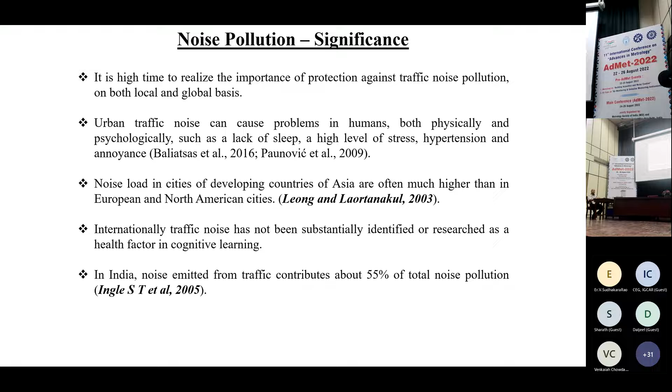So everybody knows what is a silent zone. Within 100 meters of any institution buildings like hospitals, educational institutions, courts are silent zones. But these silent zones are very crucial and have significant health impacts on school children and hospital patients. When I talk of hospital patients, if they are neonatals, that is very, very crucial. And even in judiciary proceedings, these are all silent zones as per the CPCB rules, noise regulation and control rules 2000.

What three activities are banned? Use of vehicular horns, loudspeakers, and bursting of crackers. They are banned as per the amendment 2009.

So it is necessary to assess and mitigate noise levels in these areas of silent zones.

In the silent zone, CPCB says that the permissible norms for daytime is 50 dB, whereas the actual values may vary from 55 to 79, and maybe in some congested cities it may go up to 85, 86 decibels. But these are the observations of tier 2 cities, 55 to 79 decibels. So you can imagine what is the level of non-adherence to the permissible norms of 50 decibels.

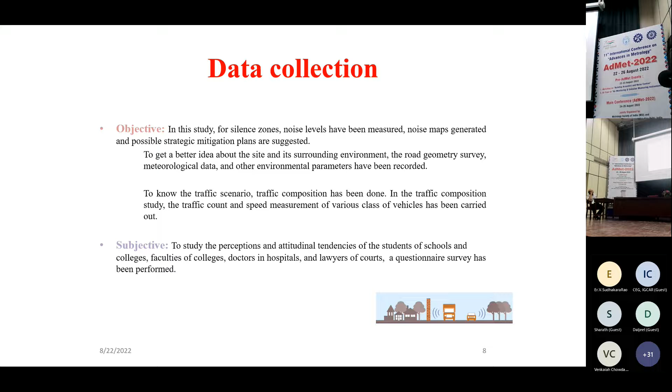So these were the monitoring points of the silent zones in the city, which were carried out over the last 1.5 years, as a project of a PhD student. So 4 hospitals were selected, 1 school was selected, 4 colleges were selected, and the last one, the 10th, is the court, which is the district and sessions court of Surat city, Surat district.

These are the 2 arterial roads. I think you cannot see the fonts, but I can read out: the institutions are 4 hospitals, 1 school, 4 colleges, and 1 court.

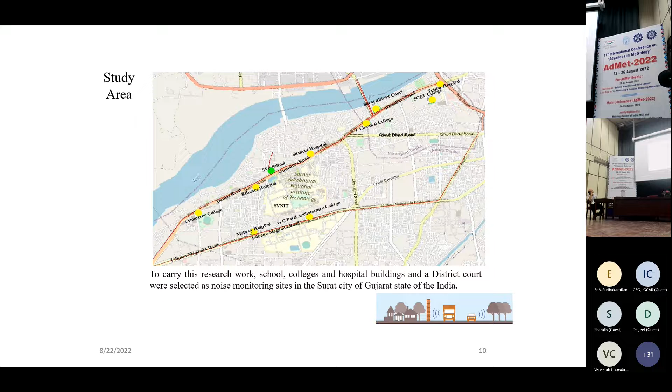These were the instruments used, as I told - a class 2 precision sound level meter. Rather, not 1 but 2 sound level meters were used: one to measure the noise levels just immediate to the source, that is on the roadside curb, and second at the receptor level, which is the exposed group of people, maybe a school or a college or a hospital or a court. A radar gun was also used to measure speed. A GIS was used to generate noise maps.

SoundPLAN - the work is being undertaken by the PhD student. He is preparing the noise barrier design. Still, it is under progress. I won't be able to show it.

These are some signage boards as per CPCB rules, for the institutions just on the roadsides.

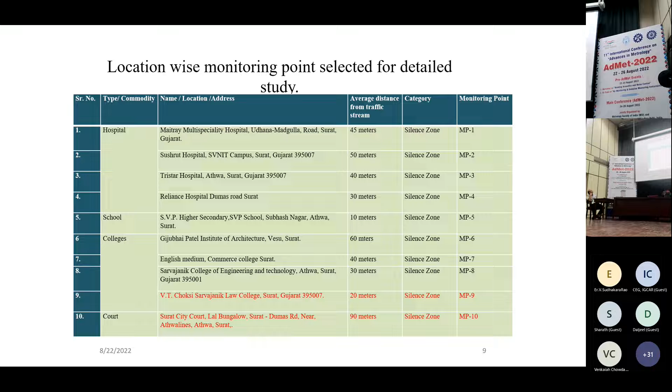So, traffic composition and noise levels. You can see inside noise, that is inside the institution. As I have shown, these distances mean the inside distance is from the actual source of the noise, which is road traffic. So the outside noise is the road traffic noise just at the curb of the road.

These are the graphical representations using two vertical axes. On the left vertical axis is the traffic volume count in the form of two-wheeler count, three-wheeler count, and four-wheeler count. Four-wheeler means basically cars, as heavy vehicles are not permitted during the daytime in Surat city.

What I can say from the traffic count is that, like all other cities of India, 70 to 80% of the share in the traffic composition is coming from two-wheelers, and the honking of horns by two-wheelers is the major share in this road traffic noise.

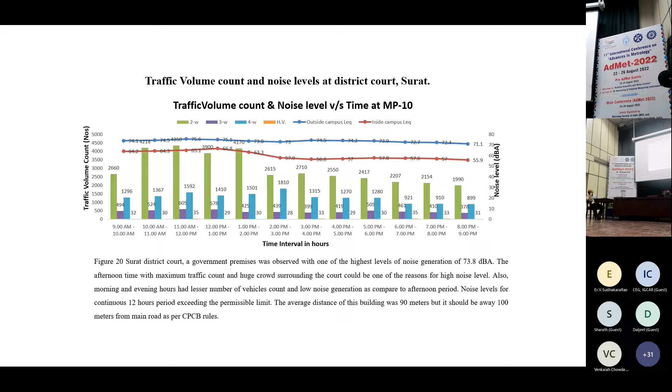I have not narrated the steps of the noise maps, as the audience is well aware of that. So this is a 3D map of the area generated in SoundPLAN, which is a current work being undertaken by the PhD student on noise barrier design. The law college, which is just adjacent to the roadside, is having significant noise levels inside also as compared to the outside.

This is the final noise map. As you can see, this dark red map is the VT Choksi Law College, and this one is the road, and the second line is the flyover bridge just adjacent to the road.

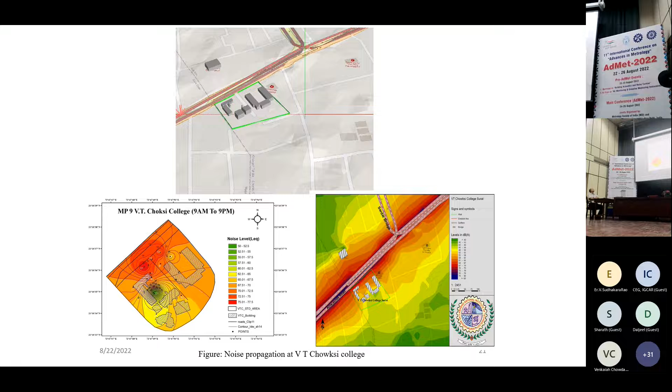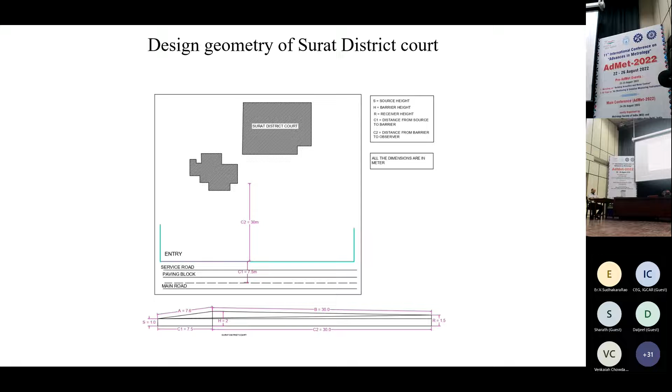Second case study is of a court. As I told, it is far away from the roadside curb, approximately 90 meters. Judiciary proceedings are going on in this institution building. In the noise map, this is a 3D map, and they are far away. This is a road, and from the road, the noise propagates and is almost coming to around 55 to 57 decibels.

So my second point of submission here is that if there is enough noise propagation distance available, maybe we can avoid the noise barrier, which is very costly. As said by Professor Parida of IIT Roorkee, approximately 1.2 to 1.5 crores of rupees is required for design and construction of a 1 kilometer stretch of noise barrier.

So this is a unique location. Here, natural vegetation can bring the noise levels from 55, 56 decibels to the permissible norms of 50 decibels.

Third aspect is the strategic noise mitigation, which I'll try to finish off very fast. I think I'm running out of time. Should I take 2 minutes more, sir? Yeah, okay, please. Fine, I'll wind it off in the next 5 slides.

In last year's international workshop by the NPL, I had given an emphasis and explanation of all these things. I think it was in October or December, 2021. This presentation of each and every component of noise mitigation was narrated by me at that point of time in that workshop, so I'll not go into the depth of each and everything.

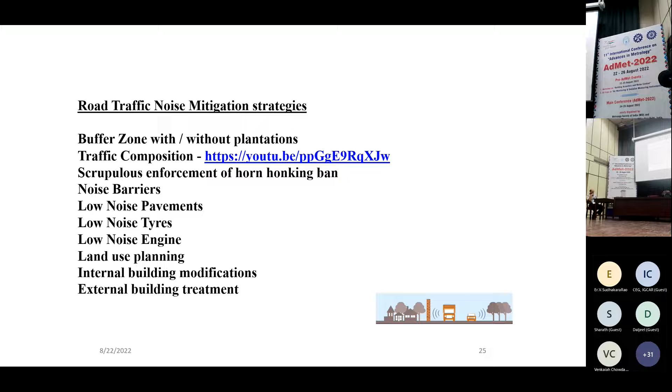One more aspect is 2-panel doors and 2-panel windows in schools, colleges, and hospitals, which can reduce noise by 4 to 7 decibels. A reduction of 4 to 7 decibels is a very significant achievement as per acoustic theory. I think I'll end here.

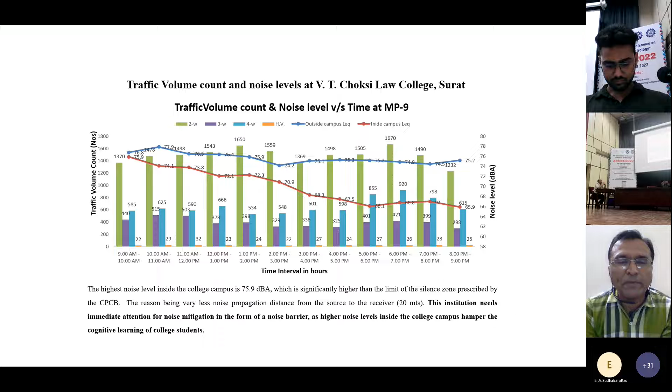Yeah, but highways on the outskirts of cities can be considered for that. Yes, it is being done. If you take any expressway or new highway by NHAI, it will definitely have plantations. The National Highway Authority should make it mandatory to go ahead with this kind of plantation.

Yeah, if you have any information, please share. Otherwise, no problem, I'll share it with the NPL people. Okay, thank you very much, Professor Pendel, for your nice presentation.

I think, sir, can I have one suggestion? Yes, please. It's a very good thing to gather people working on this, because in environmental engineering, of course you're all acoustic people, but we've had water and wastewater for 30-40 years, air pollution for 10-12 years, but noise is a neonatal field, it's being born in India. Am I correct, sir? Yes.

Since only the last 4-5 years has there been awareness about noise. So as I was listening to Lokhande sir's presentation on tunnel noise, it's very fascinating how people are working on this. My humble submission would be that if we keep fewer presentations and increase the duration to 30-35 minutes, that will allow much better interaction, sir, rather than having 15 minutes like we do in our conferences. This is just my suggestion, sir.

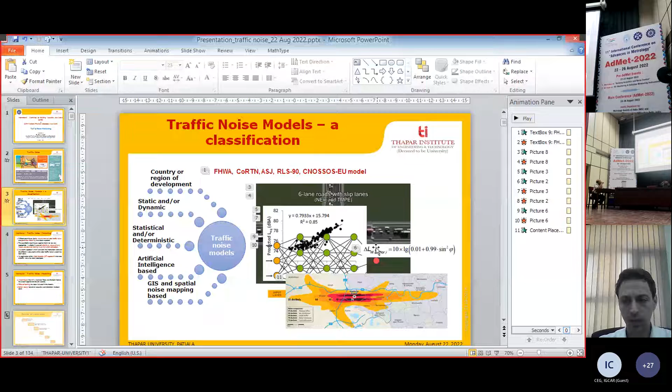Your slide is not moving actually. Slide is not moving. Yeah, make it full screen. Yes. Is it moving now? No, still it is the same. Not moving. Hello. We are not able to receive you also.

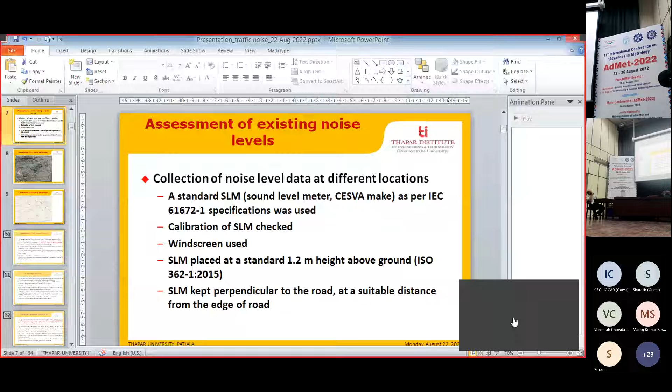Is it visible now? Yeah. And the slides, are they moving? Yes, yes. Sorry about that, now they are moving. Yes.

I talked about the classification of the different models, the type of models that are there.

Okay, I hope now the slide is moving. Yes, yes, they are moving now.

So I'll be talking about the graph theoretic approach, which can be used when there are subjective, vague, or fuzzy inputs, and decision making involving human perception is involved. Also, artificial intelligence or machine learning techniques like ANN, decision trees, and random forests.

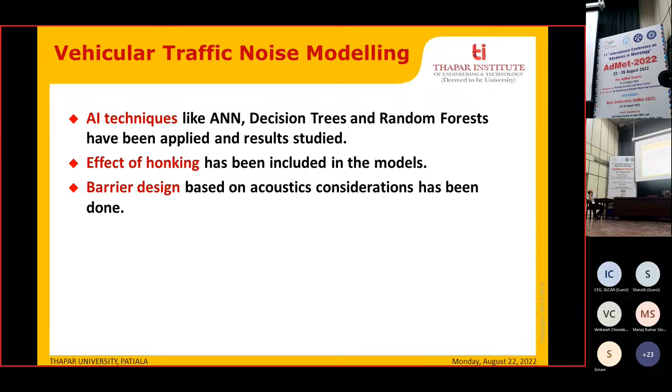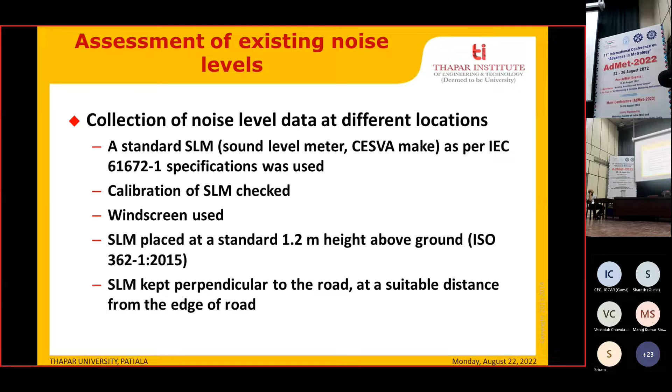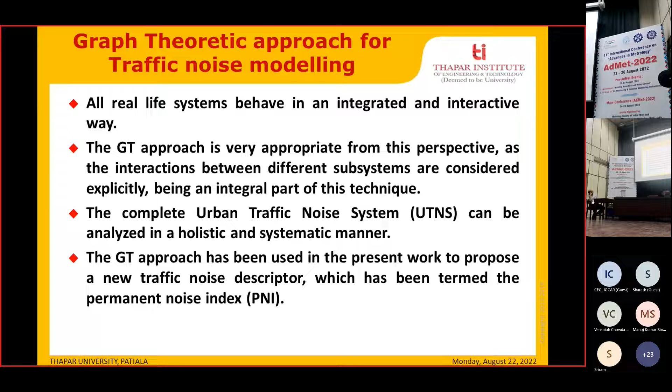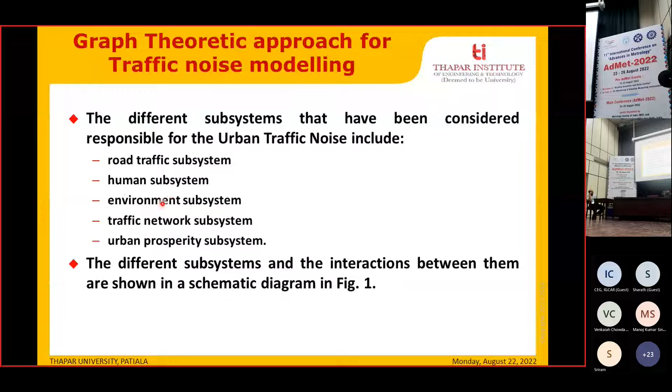First, an urban traffic noise system was formulated, which can be analyzed in a systematic and holistic way. We'll see later that a permanent noise index was also developed on the basis of the considered criteria. Within the urban traffic noise system, 5 subsystems were considered: road traffic, human subsystem, environment, traffic network, and urban prosperity subsystems.

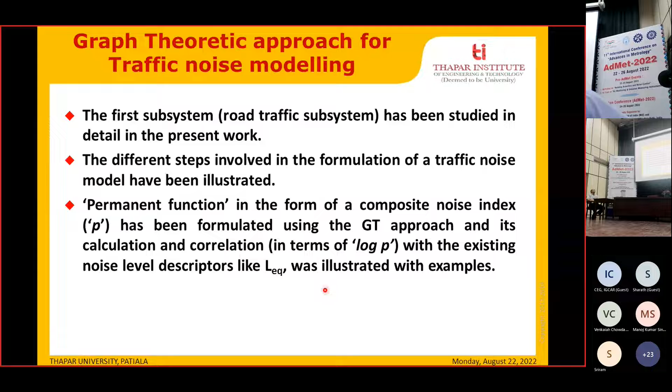The different steps involved will be discussed here, and a permanent function in the form of a composite noise index P is formulated, and its correlation in terms of log P with different traffic noise descriptors will be listed in an example.

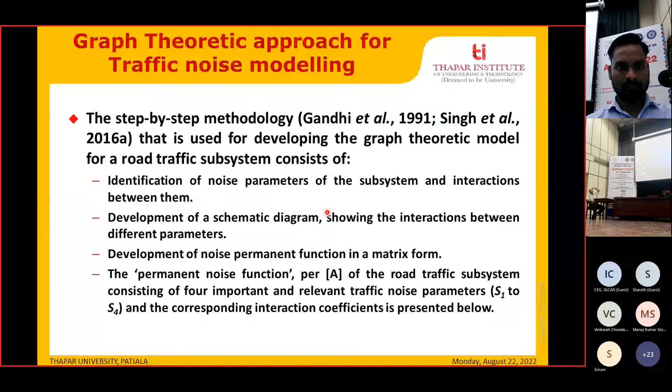So the step-by-step methodology for this GT approach will be discussed. The details can be seen in these papers, these publications. S1, S2, S3, the diagonal terms, represent the subsystems of the urban traffic noise system, and the off-diagonal terms, EIJs, are the interactions between these subsystems.

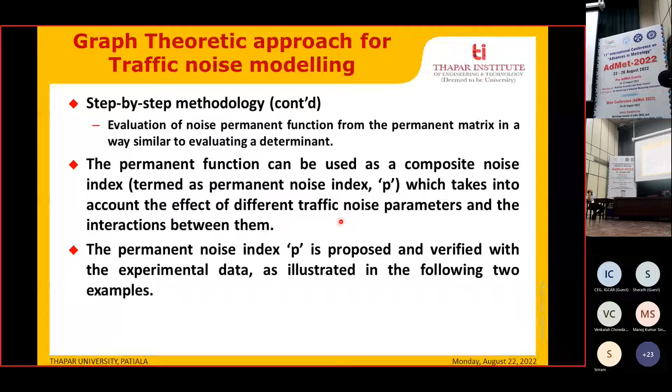Then the evaluation of the noise permanent function is done by assigning certain weights or scores to all these diagonal and off-diagonal terms, and a permanent noise index P is calculated. So with an example, I will discuss this.

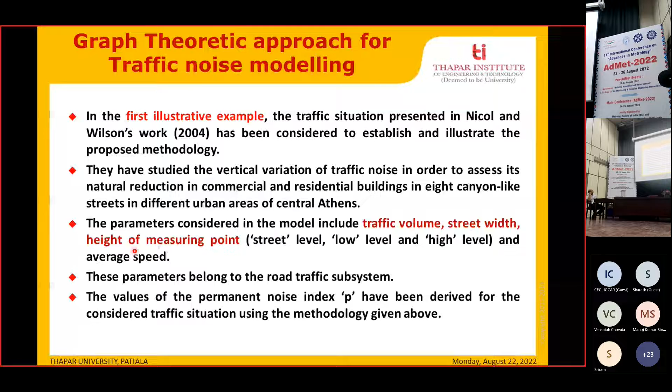In the first example, the traffic scenario presented by Nicol and Wilson has been taken, so the data is taken from there. The considered parameters are traffic volume, street width, height of measuring point, and these parameters belong to the road traffic subsystem, the first subsystem in the urban traffic noise system.

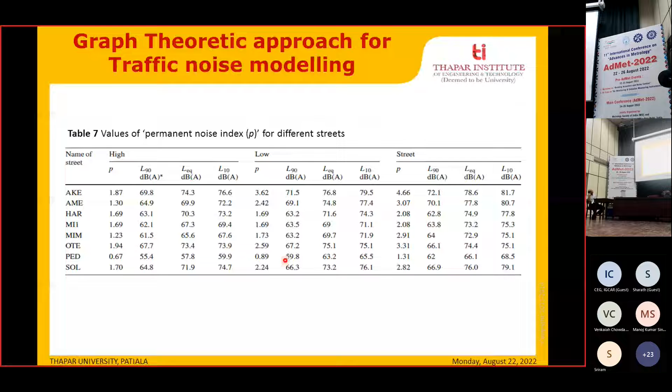The step-by-step methodology, the permanent noise index values are calculated, as we can see here, and their correlation with the different noise descriptors, LEQ and other descriptors, is done, which can be seen here as well. It was seen that the permanent function values correlate well with the noise levels in each case. In order to measure the correlation between the permanent function and the noise descriptors, regression analysis was done by taking log P as the independent variable.

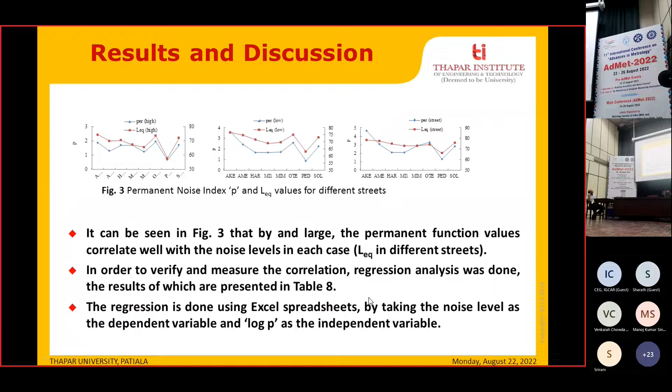So these are the results of the analysis, and we can see with R square values and also the error values between measured and predicted values, there is sufficient correlation between the permanent function and the noise descriptors.

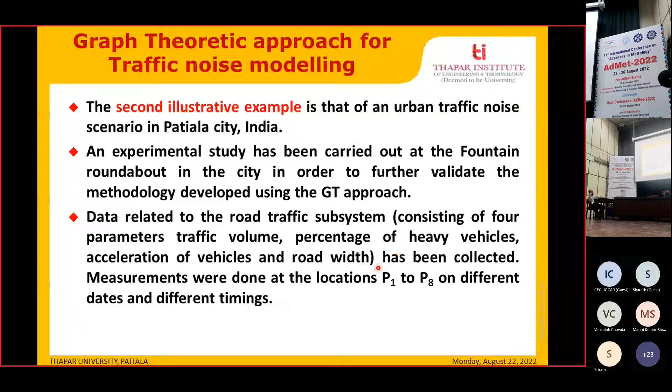The second example is for an urban traffic noise scenario. Here again the road traffic subsystem is considered, and 4 parameters are considered: traffic volume, percentage of heavy vehicles, acceleration, and road width.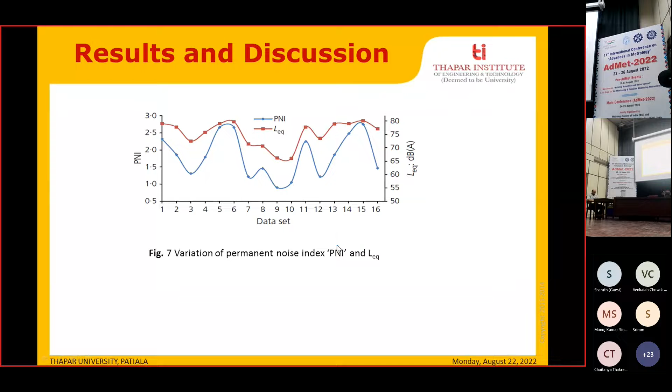Now this was the graph theoretic approach, and seemingly in the traffic noise scenario, it was applied for the first time, though it has been applied in other areas.

So the second approach that I am discussing over here is the soft computing approach, in which different AI or machine learning techniques were used.

4 methods have been used over here, and they have been compared by taking these parameters: traffic volume, percentage of heavy vehicles, and average speed of vehicles, again in Patiala city.

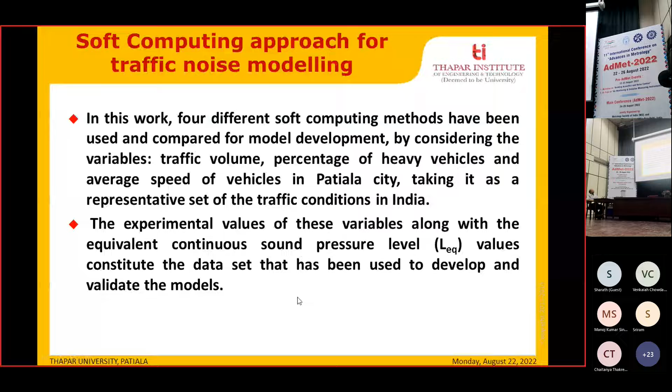LEQ values were also measured using the sound level meter and the standard methodology. The 4 methods used over here include GLM, decision trees, neural networks, and random forests.

Decision trees and random forests, seemingly in the traffic noise area, were used for the first time. The other techniques have been used, like ANNs, GAs, fuzzy logic. So you can see some of the literature over here. These methods are popularly used in this area as well.

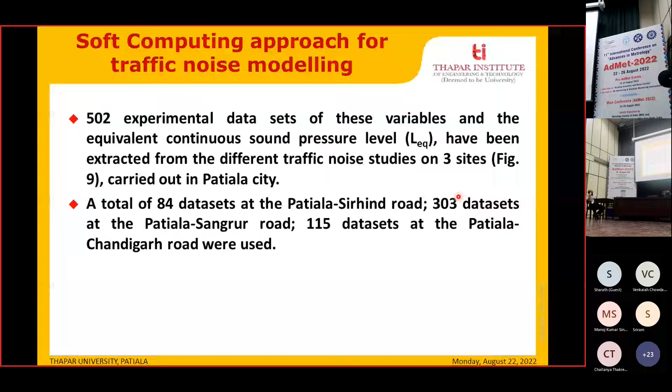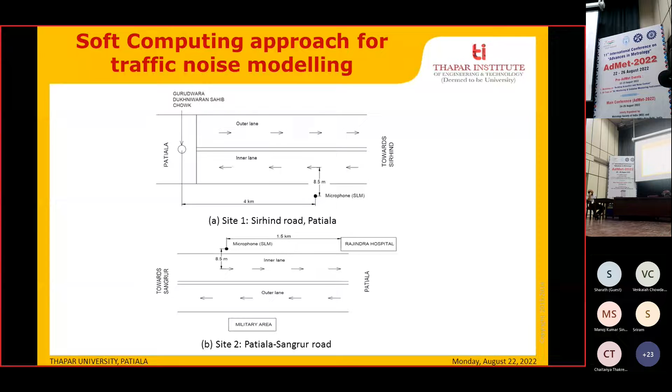These are the data sets that were collected at the different road segments in Patiala city. This is a schematic diagram of those road sections and the distances. And this is a sample data set for the considered variables or parameters and values.

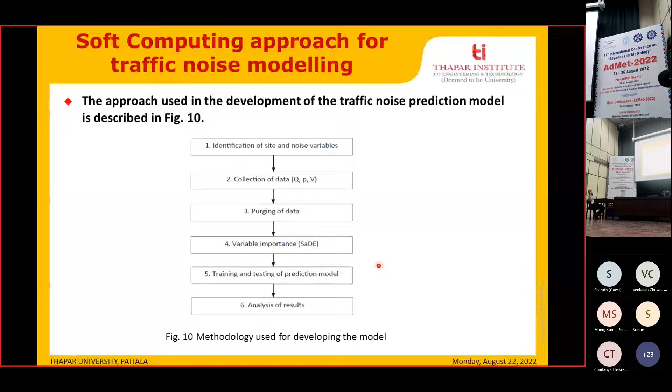So this was the approach used for developing the model: site identification, noise variables, collection of data. For the variable importance, like scoring the different parameters in order of importance.

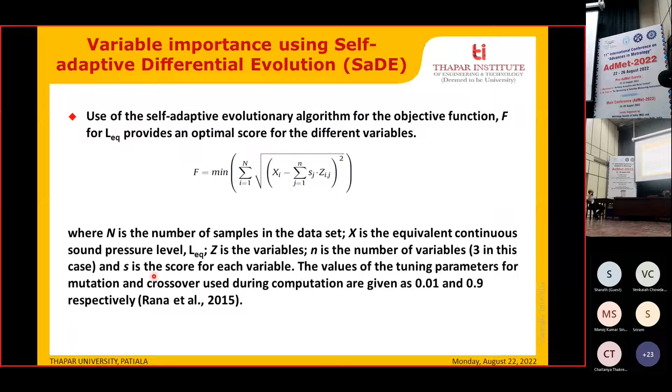This particular self-adaptive differential evolution method was used, in which this is the objective function: n is the number of samples, x is the LEQ value, Z is the variables, and n is the number of variables, which are 3 over here, s is the score for each variable. So using this method, the scoring or the variable importance was done.

Traffic volume is the most significant over here, as has been seen in other studies also. But if you have a large number of parameters, and you want to find or score these variables, this method can be used.

So this is the prediction method. Inputs: the data, the 3 variables, the prediction model using the soft computing approach, and the LEQ value, that is the output.

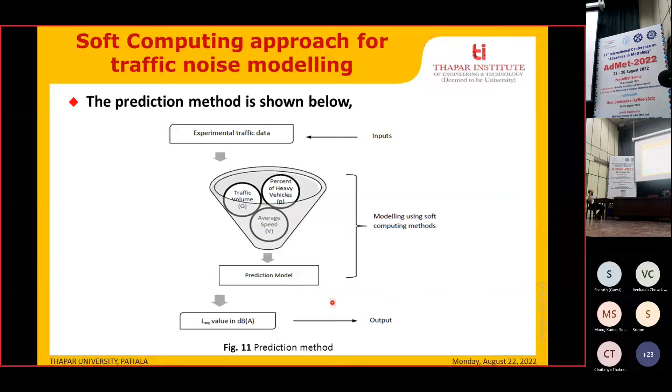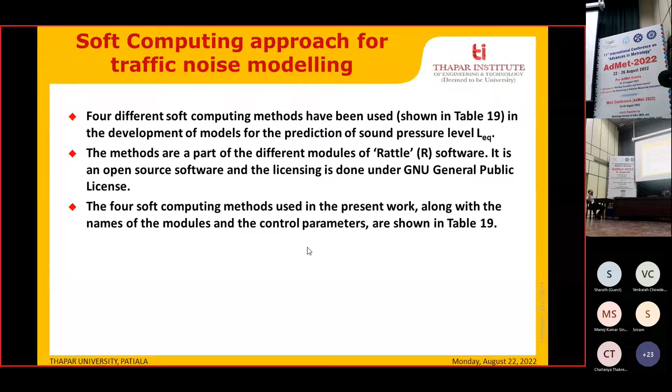The Rattle R software, which is an open source software, was used for these 4 soft computing methods. These are the methods, names of the modules, and the parameters and values that were used in these methods.

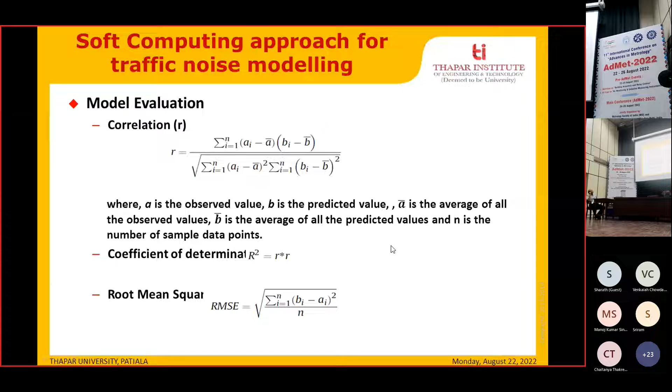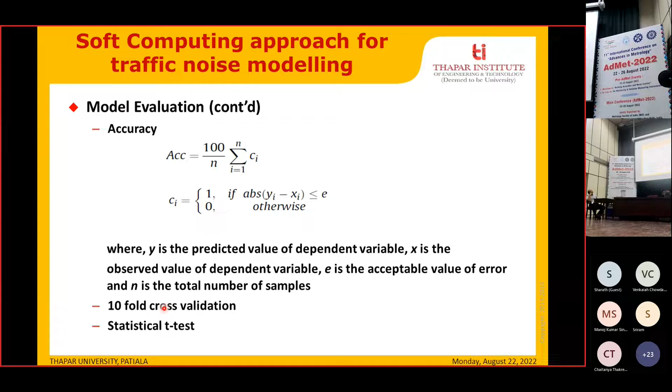The criteria considered for the model evaluation, for comparing them, was correlation R, R square, root mean square, and accuracy. So these are the criteria that were considered. A 10-fold cross validation was also done, and also a t-test was done.

So these are the predicted values given by the different methods, the 4 methods that were used. The random forest method was giving the best results, both for training and testing data sets, the highest level of accuracy, and the other criteria values, given by the random forest method.

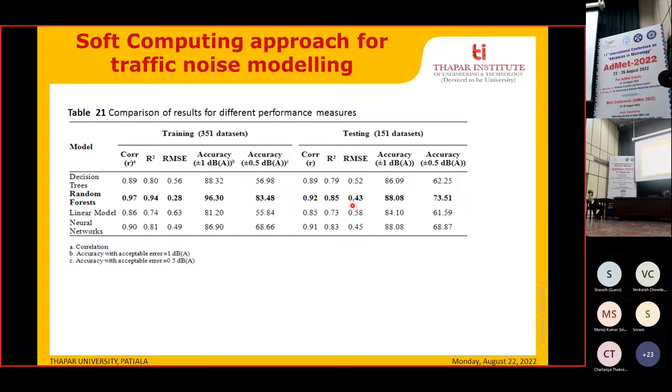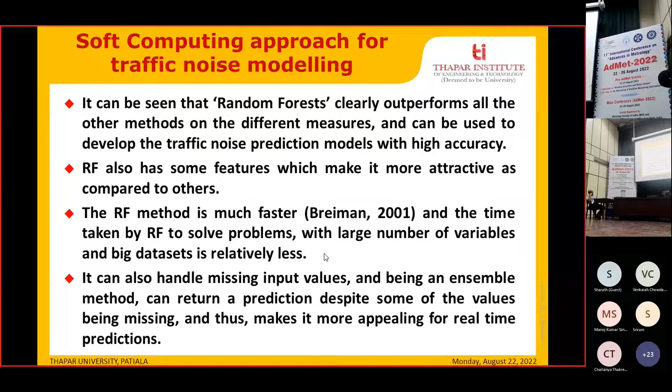So this random forest method outperformed the other methods. It has various benefits, so it can be used for different data sets with these benefits. So it can be applied to different scenarios.

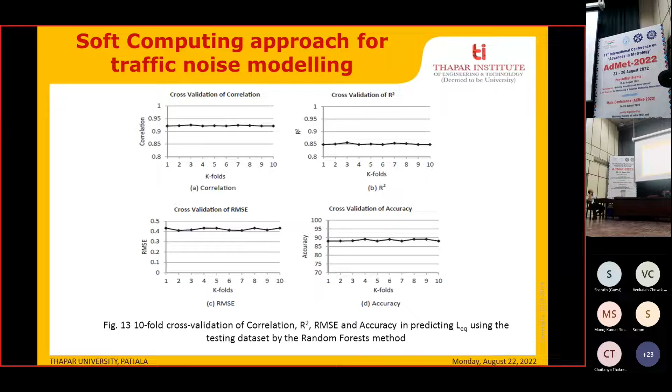Showing the predicted values, they are correlating well with the field data.

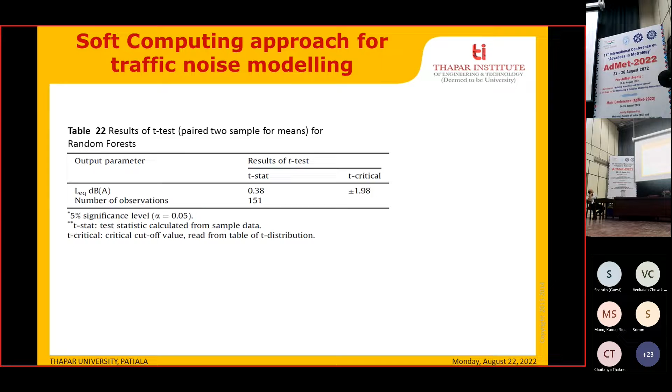So those were the 2 approaches that we tried, explored, and applied to the traffic noise scenario in Patiala city. There are various different methods available and research going on those methods, so depending on the requirements, these methods can be used and explored further.

So now, other areas that we have touched upon, like we have also studied honking. The effect of honking in the traffic noise scenario, especially in congested areas, is considerable and significant and should be included also.

Using regression and machine learning, we have seen the effects, though I'm not presenting the results due to time constraints. We found that when we include honking, our prediction accuracy and correlation improves. When we discard the honking values, it reduces, indicating that honking should be included, especially in the Indian traffic noise scenario, because it is quite predominant.

Traffic noise barriers - we have done acoustical noise modeling for that also, and that has been discussed by Professor Tandal as well, so I will not go into those details.

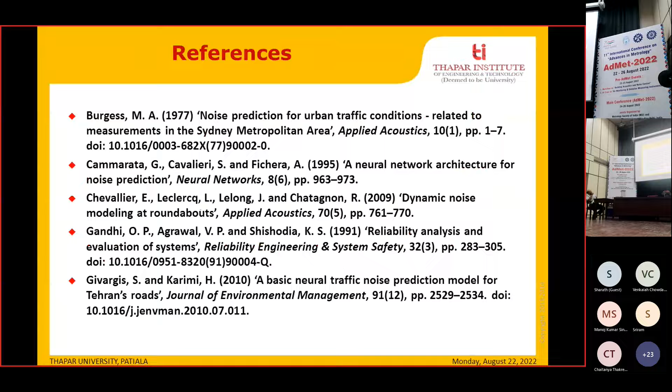Thank you, Professor Gandhi. Now the floor is open - if the audience wants to ask one question, please go ahead. I hope the slides were visible and did not stop in between. Yeah, initially there was a problem, but later it was okay. Sorry about the beginning.

Thank you very much - an excellent talk with a lot of mathematics in the modeling. Thanks to the audience. Thank you, sir, thank you very much for the invitation again. There is no question from the audience, so on behalf of the organizers and the audience, I thank you very much for your excellent talk. You can stop sharing now.

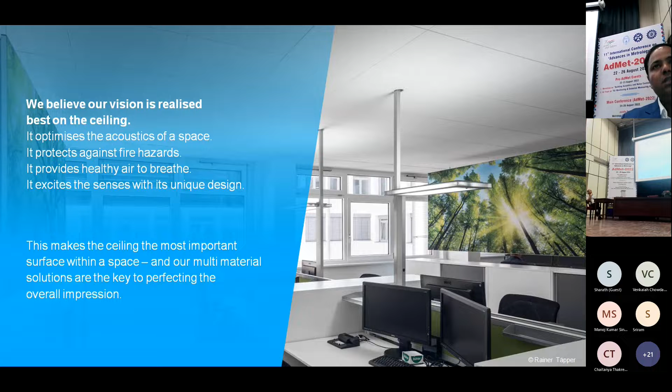So apart from these safety parameters, we have our multi-material solutions with different material parameters, which are based on acoustics, safety which is fire safety, health and hygiene which is the hygiene factor of the material, and of course the material itself. The fourth one is the design part of the thing.

Together with our customer, we grow stronger is our new statement, which we are thinking to align to the industry, which is based on the quality parameters, their different dynamics, services, individuality, diversity, reliability, sustainability, and of course the responsibility.

So as a company providing ceiling solutions, we have the thought process of your ceiling, our solution. It simply starts with your design intent and your expectation and the need of the building. And we as a manufacturer of multi-material solutions provide all the solutions sitting together with the same concept. Our leading stakeholders are of course the architects who design the building.

There are different types of buildings. So as a manufacturer, we have 4 different partners to work together to provide the right solution to the building, starting with the architects, the distributors, the GC contractors, and also the planners. So we as manufacturer collaborate with all parties together and have the accountability to provide the right solution as per the building needs.

So along with this running business for this one segment, we are also equally responsible to align with the guidelines of authorities, PMCs, and government business. So we have all these documents to support the guidelines.

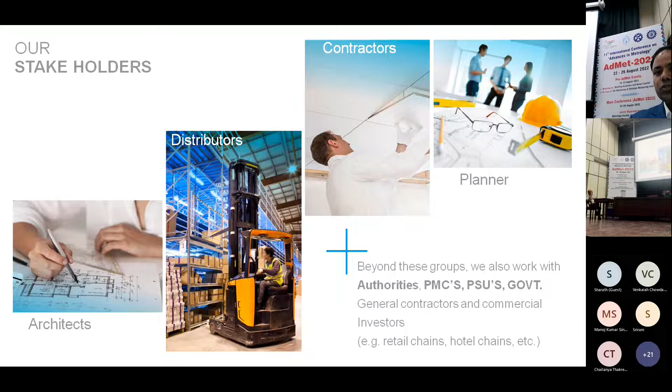That's how we work. And the life cycle for all products is based on resource saving, harmless, healthy products which we manufacture. So our raw materials are based on natural products which we use, which have different certifications based on fire safety, FSC and PEFC. We also have different production which is based on CE certificates.

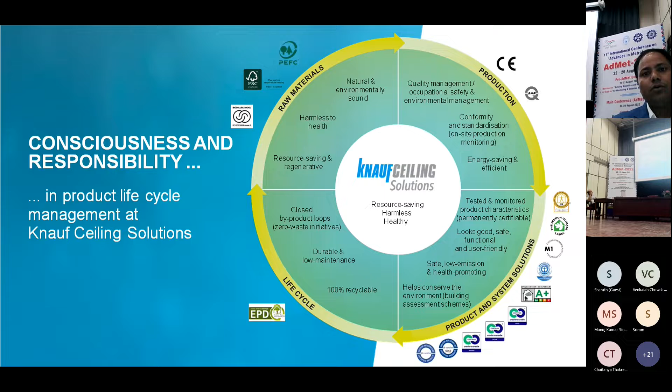Also, we have product and system solutions. We follow all global standards, the European and US standards for safety and hygiene. Then we follow the life cycle of a product, which is based on the EPD, environmental product declaration, which is basically a green product. That's how we believe in the manufacturing process.

Then there is a suspension system, which also has different grades in terms of fire safety, because a ceiling has different components apart from the tile, which is the suspension system. So there are certain guidelines which we follow.

So coming back to our solutions, basically we are the brand with the largest stake among multi-material solution providers. We have different materials in terms of solutions. There are a lot of players in the ceiling business who are leaders in one particular material, or could be in 2 or 3 materials. We are the only player with the largest portfolio in the world.

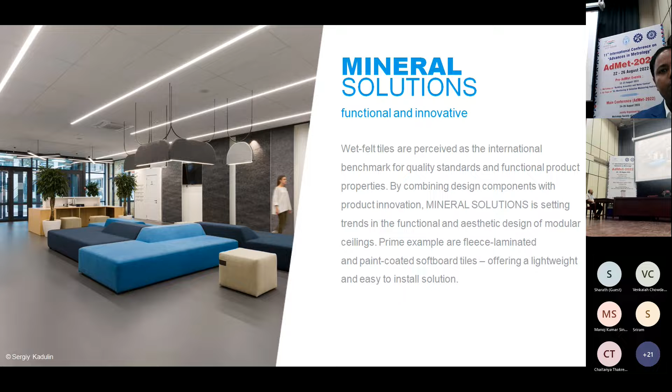It starts with mineral fiber. Mineral fiber is more of a modular ceiling solution, basically a mass business. The production of mineral fiber is in a tile format of 600 or 1200, or 300 by 1200. That's how it's more of a modular ceiling based on certain acoustical values along with hygiene and fire safety. Apart from mineral fiber, we also have metal solutions.

So metal is more of a customized business. It's kind of an ocean which we can think of and develop with certain standards. More of the infra projects are with metal ceiling, if we see. Apart from metal, we also have wood wool and wood ceiling.

Wood is a 100% natural material for us, and wood wool we manufacture in Austria. It's again an acoustical material with natural raw material, eco-friendly, and it can give you huge acoustical value, not only for high frequency but also for lower frequency. It also gives a lot of flexibility for different colors.

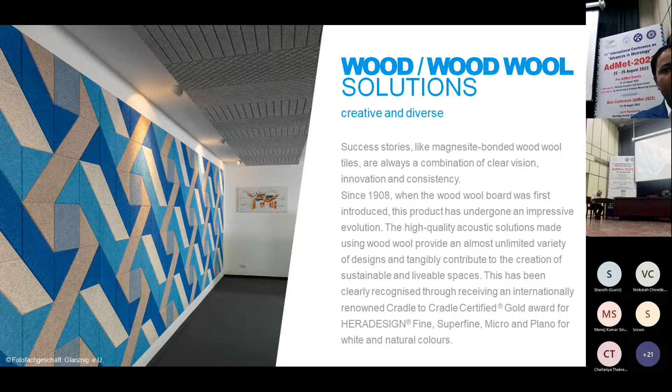So let's say you can match a carpet with the ceiling. Any color, any orange shade, is possible. That's how this wood wool works.

Coming back to our suspension system - being manufacturers, we have certain guidelines for safety parameters, because this is a system which is going to suspend from the roof and hold a huge weight. It also holds for acoustic and fire performance - fire is equally important for any building. That's how suspension works, and we have a guideline of REI 30 to 120.

A little about features of our material - we have different materials based on certain features which are common for all materials. This is a great point to talk about acoustics. In our material, acoustic basically has two different parameters, which are the major parameters for selecting the right material.

One is sound absorption, second is sound reduction. There are different standards too - Europe follows the alpha value, and we follow the NRC values. For sound absorption, there are different materials - up to 100% sound absorption, we have material with alpha value 1, in different materials like wood wool or wood solutions.

And sound attenuation, which is more of a dB value, up to 43 dB - we have a solution either for ceiling or even in some cases involving mounting as well.

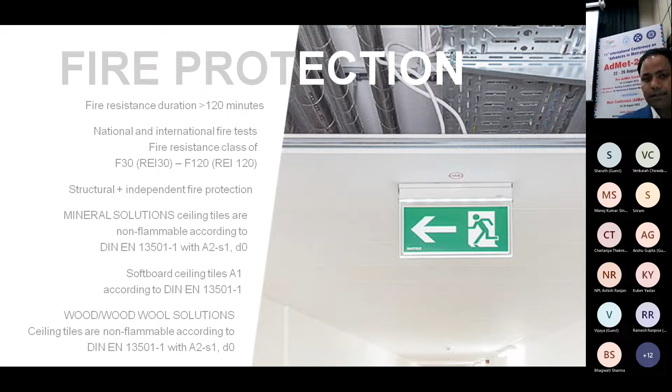Apart from that, material and design - design is something like aesthetics, which any designer or stakeholder will lead more into, how it looks. So sometimes as manufacturers, our first priority is acoustic, then hygiene, and the fourth one is material and design.

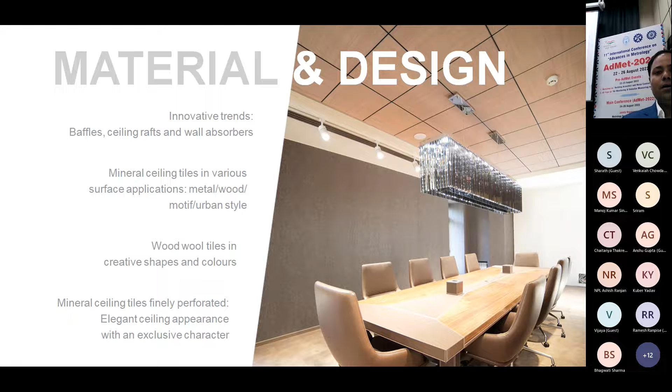Aesthetic is equally important, but as manufacturers, it falls a little later in that process. When we design or work with stakeholders, aesthetic is something everybody is keen about - how it looks. So technical parameters are more important than aesthetics, but yes, it has to be equally feasible. Our material gives a lot of flexibility to us and the stakeholder to have the right material at the right place with so many options.

These are the areas or applications where we have a great pool helping industry have better solutions. Offices, of course, are our bread and butter. We have the largest estate globally. Coming back to education, we help educational stakeholders choose the right material in the right areas.

Sometimes, if we look at institutions, people still believe in something we call 'acoustical darkness,' which may sound a little wrong. Acoustic matters because students come to college for education, so they have to hear properly. So we have to choose the right material even in education.

Coming back to restaurants, there are a lot more people going into hotels or restaurants, so there is huge sound, which also increases the stress level. So we have to select the right material.

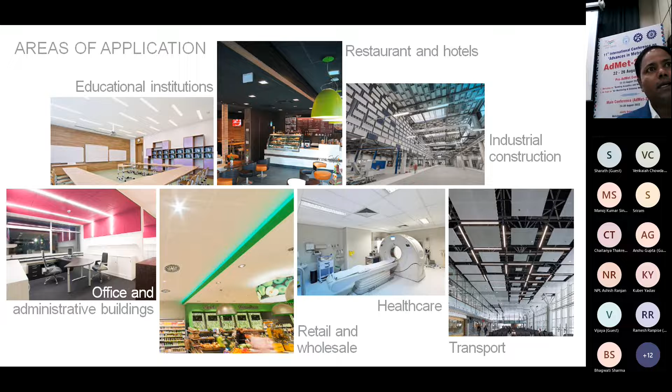Coming back to our applications, I tried mixing in some images of projects we have done, not only in India but also in Europe, the Middle East, and the US market. I'll go through some installed images for these areas.

I personally chose this image of corridors. In India, there are huge issues in this segment because people keep designing modular ceilings in these areas, which have a lot of services. There are huge acoustical issues, and corridors are basically the escape-away zone for any institution or building. So the solution should be a free span system, which we follow and guide the industry to use. It gives huge fire safety, very low maintenance material. Anybody can remove one tile and put it all on one side. It gives access to the ceiling, and also gives up to 70% of acoustical values.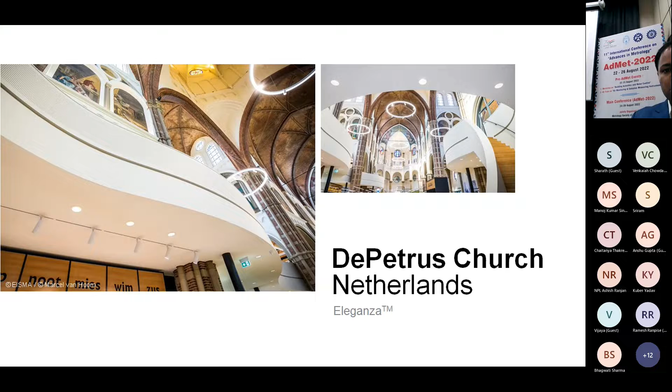These are some global images with different materials: mineral fiber, metal, wood wool. There's again wood wool board with a different design. There's again mineral fiber, soft fiber combined with mineral fiber. There's again soft fiber in a different shape. This is a seamless ceiling, which we use more in the Europe market, but in India we are coming up with the same. With mineral fiber, even in the vertical format, we can do it.

Coarse metal, mesh, some wood with the combination of metal, and of course vertical and horizontal ceiling in wood we can do. Some mineral with the combination of mesh. So these all are solutions which we are capable to do. We can sit together to develop as per the building need with multi-material solutions.

Just to have a little more, yeah, I think I finished it, sir. And lastly, initially there was some technical glitch, so I was a little hesitant to connect and be on track. So thank you so much for your patience hearing, and I'm open for any queries if anybody wants to ask, please.

Thank you, Mr. Yadav. It was nice, a lot of good pictures and a lot of solutions to offer. Any question is there? Please go ahead. No question in the audience? No issues, sir, our IDs are there.

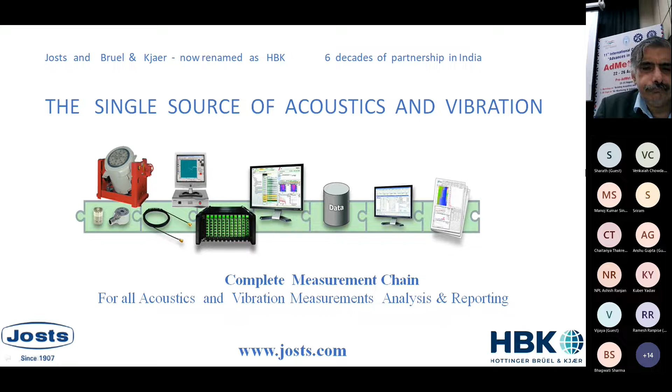Okay, a brief presentation on Josts Engineering, just more than 35 years, go through all that. We are the partners of HBK, earlier Bruel & Kjaer, with more than 6 decades of partnership with them. They are the only company which provides a complete measurement chain for all acoustics and vibration measurement, analysis, and reporting solutions. A long history of excellence in terms of microphones and accelerometers, more than 6 decades since the time Dr. Bruel made the first microphones and the first accelerometers.

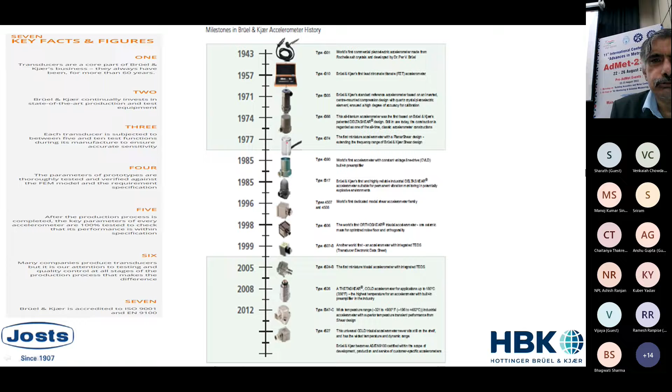So I would say that our record on the transducers is next to none. We have the acoustic transducers, the vibration transducers, whether it's measurement microphones, binaural audio microphones, acoustic material testing kits, array systems for holography, calibrations whether handheld or complete calibration systems, including what is there in NPL, sound intensity probes, sound sources, microphone accessories.

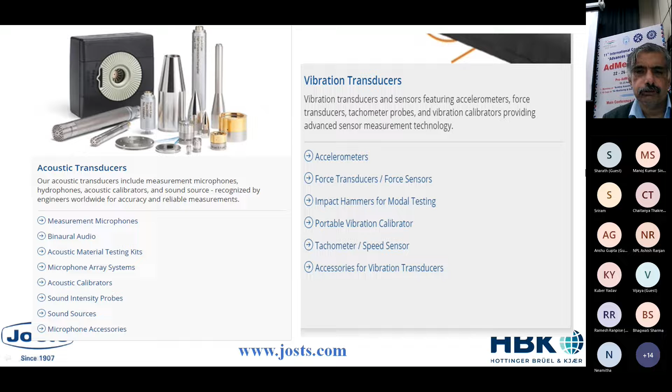Similarly, for accelerometers, force transducers, vibration calibrators, and again calibration systems. And torsional oscillators, the only such system certified by PTB for high frequency measurements, signal conditioning amplifiers for almost all the applications. Our data acquisition systems growing from 4 channels to 400 channels. Some of the largest systems in India today, including a 100-channel system at ISRO, a very high speed 30-channel system at NAL.

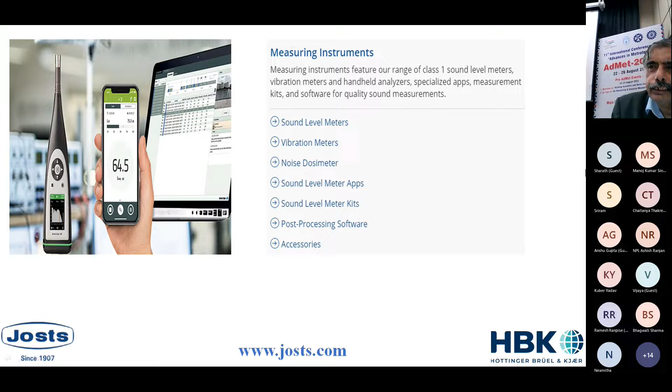A 200-channel system here in Delhi at Maruti, many other systems at most of the automotive, aerospace, and engineering companies. Our latest 2255, which will be on demonstration tomorrow, the poster is out here. We will be showing how this does building acoustic measurements as per ISO 16283.

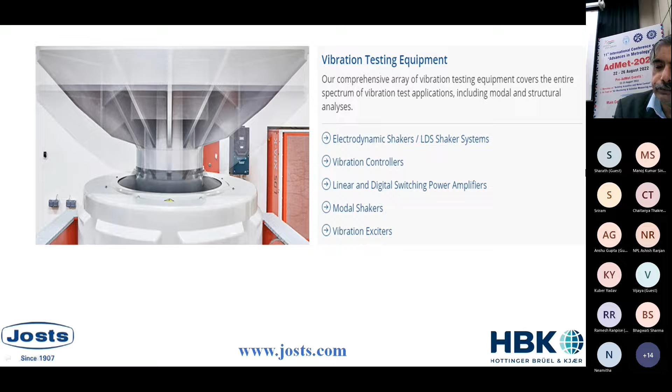Vibration testing equipment, with the merger of LDS to B&K a few years back, we are the world's largest vibration testing company, and almost all the large shakers in India, including at all the space organizations, are from LDS. A complete data acquisition system for almost any application that you can think of.

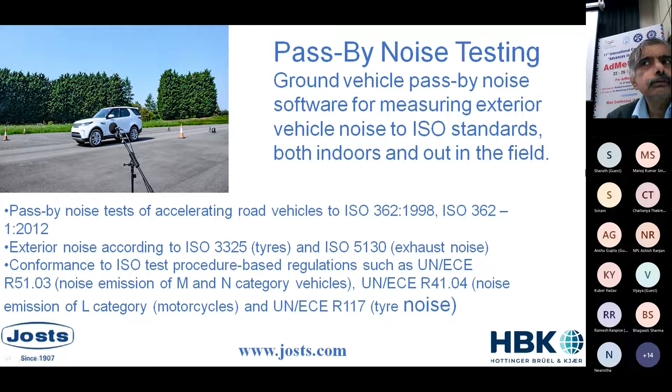Some of the applications that are relevant here are noise source location, sound power as per ISO 3744, acoustic material testing in the tube for all samples, and pass-by noise testing today. Some of the top manufacturers in India including Apollo Tires and JK Tires use this system for external pass-by; Hero Motors here near Jaipur uses both the external and internal pass-by systems.

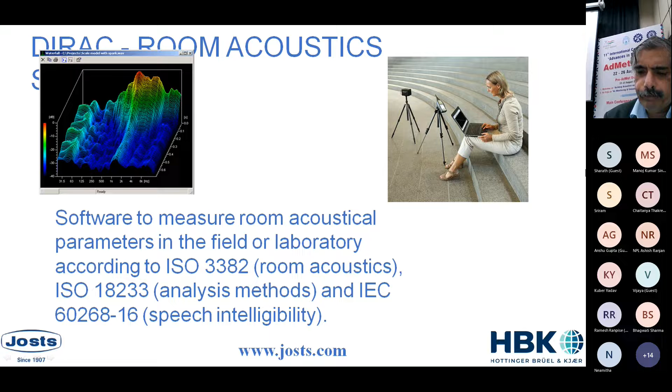Dirac, or the software on room acoustics, which you saw in the morning, one of the applications being for barrier testing. The EN1793 noise barrier measurement system, again which our partners from Netherlands showed in the morning, meets all the standards for barrier noise measurements.

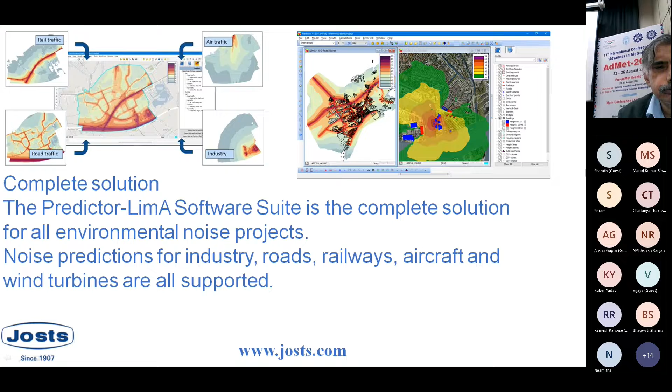Predictor-LimA, again one of the world's largest noise mapping systems today. It's used in India by NEERI and by L&T, by VNIT, to just name a few. At Josts, we are not just a product company, we provide complete solutions, application support, AMCs, repair, and customized projects.

We have done a lot of special projects like enclosures, acoustic treatment, anechoic chambers, vibration testing, production testing, installation, commissioning, and training. So it's a calibration of all equipment, a single source solution for almost anything to do with instrumentation. A pan-India company with more than 115 years, we are committed to provide advanced engineering solutions to add value to industrial processes. So thank you very much.